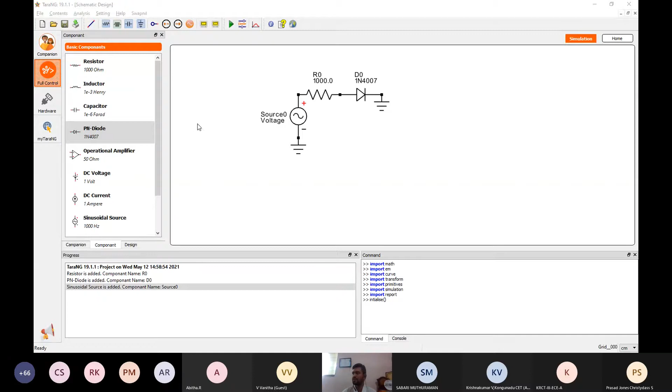So it is simulating this problem now. After simulating, we can see different results, voltages at the resistor, R0, VA and VB, I will plot. So we can see that the voltage is getting clipped around 0.6 volt because of this diode.

Now we will increase the voltage level. Instead of 1, we will try to make it 5. Apply. And now again we will run this simulation, and then plot the voltages again.

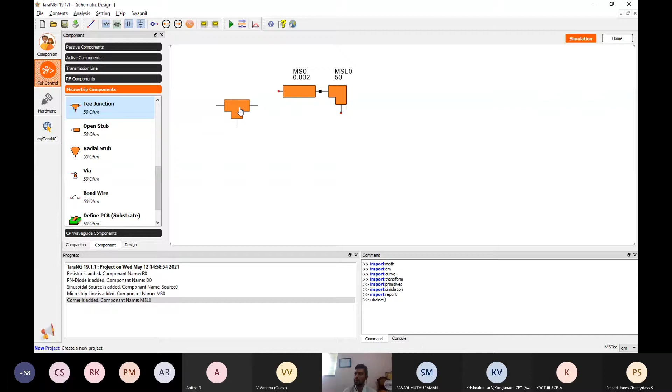Similarly, there are different kinds of subjects. We can go through microwave circuit design, taking different microstrip components like coupled lines, corners, cross, gap, T's and so on to perform high frequency analysis. These discontinuities and high frequency models are useful for creating microstrip networks, rat race couplers, and so on.

We can also use different kinds of transmission lines, like coaxial, twisted pair cable and rectangular waveguide. By using these components, we can create different high frequency circuitries and run them for S parameter analysis. We can also take isolators, circulators - mostly all necessary components are there. We can also make circuitry using CPW lines.

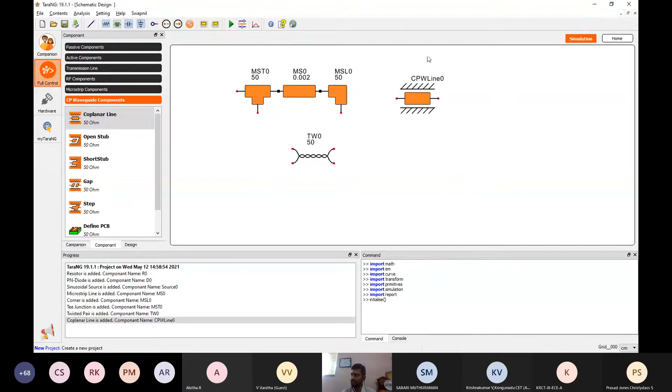Now I'll go back to the home and click on the circuit block diagram design. The difference between circuit analysis and block diagram is that in circuit we have the relation between voltages and currents, while in block diagram you have the relation between voltage and voltage only. So this is also called the signal flow model, and the circuit is also called the conservative model.

Here again we can perform different kinds of subjects, like communication system or control system. We can take different feedback loops and delay blocks, and make a feedback loop from this particular system. We can add the wire, and this way we can make these feedback systems and run the simulation.

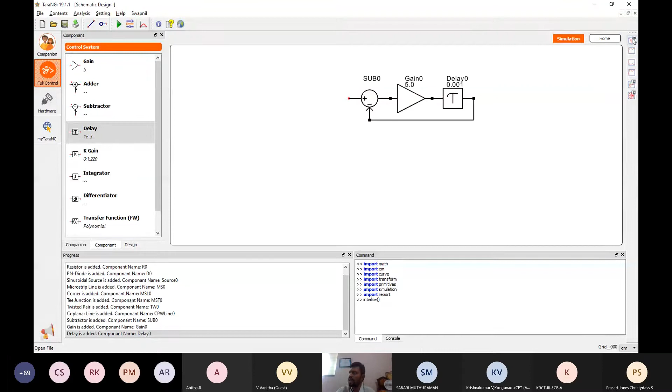At the output, we will have Nyquist plot, root locus plot, Bode diagram. Then there are also a few more subjects in this control system that you can go through - this microwave circuit, electronics, power electronic, control system, communication system, signal processing.

In communication system, you can draw different modulation techniques - we can study here. We can add this ground, and then change the frequency again here, and run the simulation.

It is going to tell us how the modulated frequency, modulated signal will be. We can also go on adding this demodulator circuit and make this larger circuit also here. For now, I'm just using this basic block to see the amplitude modulation, so this kind of waveform will be generated after performing the amplitude modulation.

We can also see the Fourier transform of this particular signal - any signal we can draw on the FFT scale. Here we can see what frequency components will be present in the circuit signal. So 200 is the input signal frequency, and because of that, we have 1000 minus 200, 1000 plus 200.

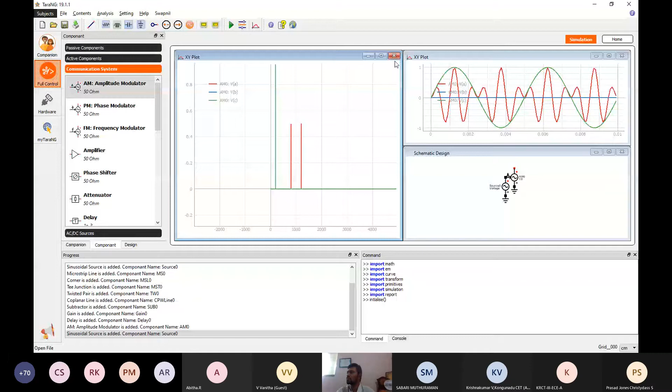Similarly, we can also do FIR and IIR filter design by taking different Z-inverse blocks, or different samplers and amplifiers and so on.

Our goal is to study this 3D design component in more detail, that is like 3D circuit design or 3D microwave design. Apart from this 3D, I'll just give one more detail - these are the 4 subject levels, like circuit we have seen just now, control system, and this system block also we have seen. In 3D, there is this facility of drawing different structures, like we can use different cable wires and so on.

For now, I will just quickly simulate one dipole antenna, and I'll explain this later, or I'll go to the ready examples. This particular 3D design is allowing us to make 3D designs, and there are different operational modes for all the subjects - one is companion mode, second is full control mode, third is hardware integration, and fourth is myTaraNG portal. I will also explain these different operational modes now.

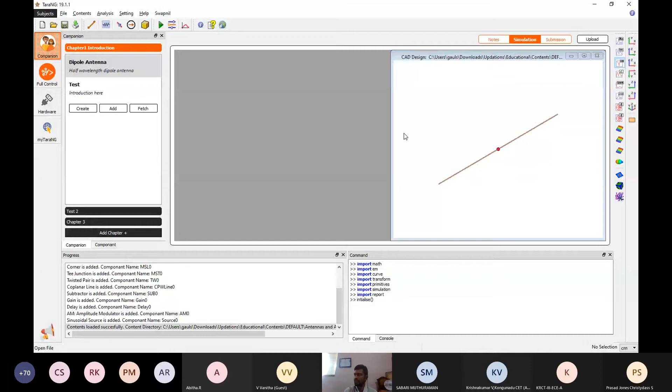After editing or after adding the things, the next thing is simulation. So in the simulation, we can see these 3D models or any related circuit or any other block diagram we are having, we can see it here. And after that, we can see different results of this particular design. So this is the real part of input impedance, then the magnitude part, S parameter.

So the second unique feature of this software is the slider. So what I will do is that I will take one slider here. So suppose this is the dipole antenna which is simulated in the companion mode, and now we want to see what is going to happen if we change the value of this diameter. So we can also assign different sliders for different elements. So this slider is again a user-defined slider which can be created by the faculty.

So here we can see that we can increase the diameter of wire, and we can see how the real part of input impedance is. So once the wire diameter increases, the input resistance will reduce. So that thing we can observe here. So in the software, whatever parameter we are using, we can assign them as a slider. So the diameter of wire, the value of resistance, the value of the location of port, anything can be a slider.

So we are increasing the diameter, and we can see how the real part of input impedance is decreasing. So we can see that both the plots are updating simultaneously. Again, there is a third plot we have plotted here. So I'll show that also. So this is the S parameter graph. So now we will see what is going to happen to the S parameter when we increase the diameter. So here we can see that this S parameter is reducing.

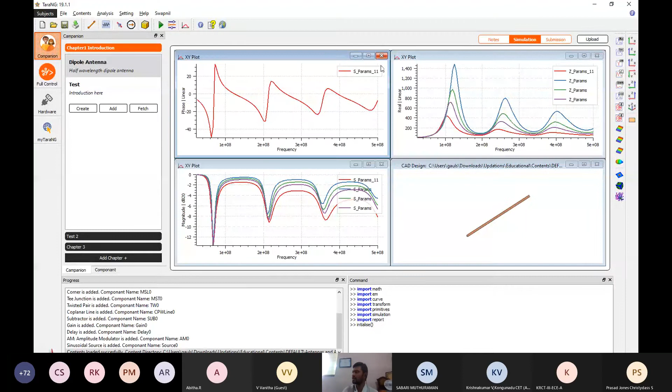We can export this graph. We can save it as JPG, PNG. We can save the CSV file. We can change the font of this axis. So many things we can do with these graphs also. And there are also features that we can plot multiple graphs like angles, then the Smith chart. So different kinds of necessary plots are there by using which we can understand this particular concept.

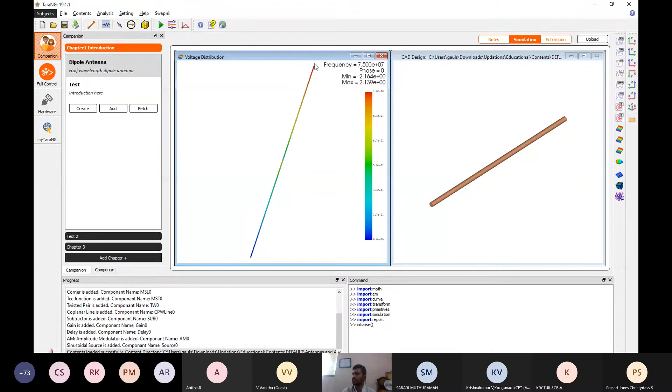We can also see this voltage distribution, current distribution. So here this is the voltage distribution where we are going to see that at one side it is peak positive and the other side it is negative maximum. So the voltage is having these maxima at the two ends, which is positive and negative. Red means maximum, blue means minimum.

And here we can also see the current distribution. We can also plot them in 2D. So the current is maximum at the center and minimum at the end. So we can see here it is maximum at the center and minimum at the end. Then we can also see the radiation pattern in 3D. And the near field also we can plot. So we need to just define the space on which we want to plot this near field.

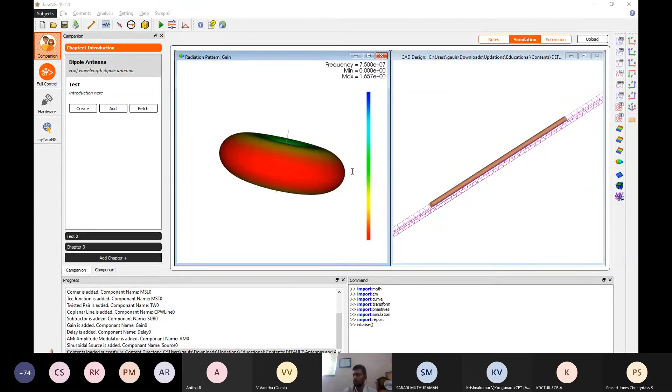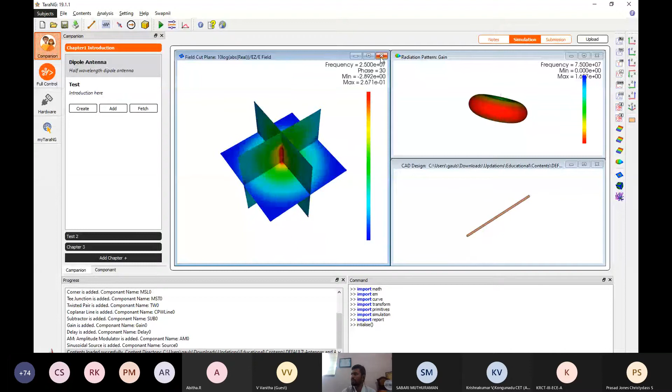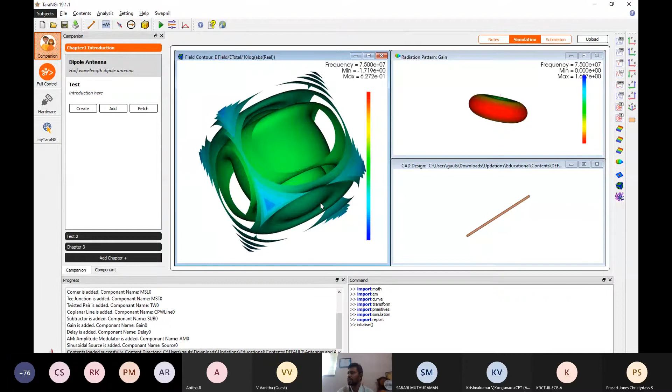So in the companion mode, what we are having is the notes. In the notes, there can be a theory written for a particular example. Then there is the simulation tab. In the simulation tab, that particular model will open. Whatever theory we are reading, the same model will be attached to the simulation tab. And there is one more tab, which is submission. So submission is related to question answer sessions. We can add multiple MCQs here.

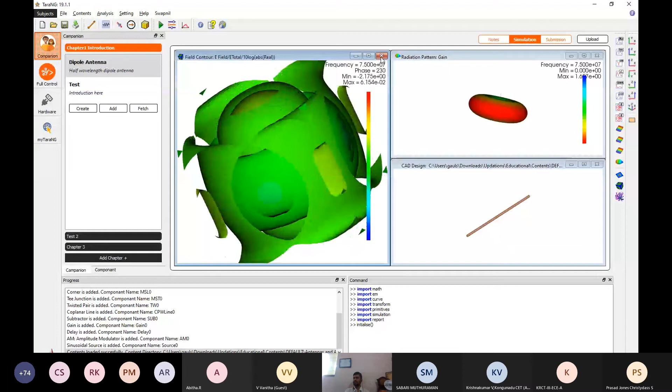So basically students are going to read the notes. Then they are going to open the simulation model. They are going to play with these simulations. And after doing these simulations, they can understand the things and they can make the submissions. Right now, in the offline software, we can only see the questions but not perform the submissions. But on the online portal, we have the submission facility also.

So in the online portal, we have the entire facility that the teacher can create the account, the teacher can upload this content to the portal, send the request to the faculty, faculty can accept the request, faculty can upload all these simulation models on the portal, then students can access those models on the portal and they can perform the submissions, then the report card will be generated. So all these facilities are available on the portal.

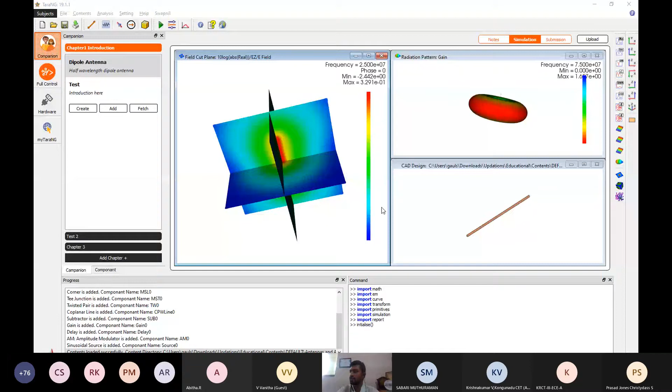So for now, I'll just tell you how to create and upload this content on the portal. For that, we just need to click on this create button. Once we click on this create button, we need to give the title, like sample 1, and then we need to write a one line introduction, and the abstract can be multiple lines. Once we add these things and click on the OK button, it is going to be added in this list, we can see.

And here we need to just right click, edit the notes and start typing. When we type and save these things, that content will be created. We need to go to the simulation model. I will explain how we have created this simulation model. We can create this dipole antenna or many other examples in the simulation model itself. After discussing the web portal, I will discuss how we have made these simulation models and simulations.

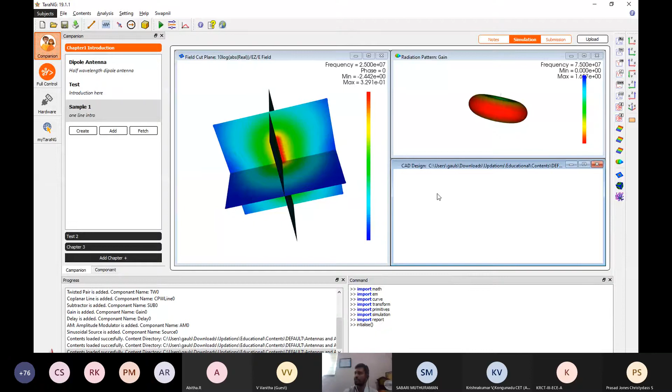So here we need to create the simulation model and run the simulation analysis. And after that, we need to add multiple questions. Once we right click, there is a window where we can type the question. We just need to cut this and type our question and options, option A, option B, option C. And I can also edit this option. We can also have a supporting image. Once we click on add, this question bank will be created.

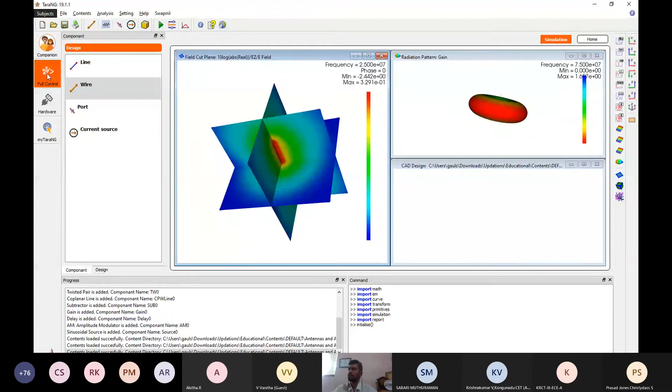And after that, we just need to click on the upload button. Once we click on the upload button, all these things will be uploaded on the web portal. How it will be uploaded, I will just explain. For that, we just need to have this account. At the start screen, we can see that there is user ID, password, and API key. So you need to register on the website of MyTarang. Once you register, you just need to enter this API key, password, and this particular email ID.

This software is also running the simulation on the cloud, so it is necessary that the user should be logged in. This machine needs to be connected to the internet, and once the user enters these details, it will be connected to the Tarang cloud. And whenever faculty clicks on the upload button, things will be uploaded to that particular account using these credentials. To get these credentials, you need to visit the myTaraNG portal.

So here it is. Here is the button, launch myTaraNG portal, or we can also get the myTaraNG portal from this fourth operation mode. Once we click on this button, this website will open, and you can take the user ID, password, and API key from this website. So I will open this website. You need to join this portal to get access to all these things. So I request Madhura to explain this myTaraNG portal now.

Yes, thank you, sir. I hope that what we have discussed so far is clear to the students. And after discussing the portal, we will discuss a few more examples on the antennas.

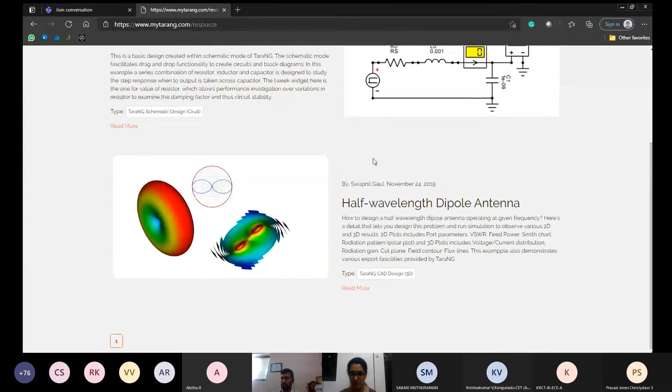Now I will show you this resource center. So here on the right side, we can see resource center. After we click there, here in resource, I will show you the half wavelength dipole antenna. So once the faculty has uploaded their content, it is seen here. The faculty's name comes as an author. Here are the notes which the faculty uploaded; the students can read all the notes first, then they can go through the

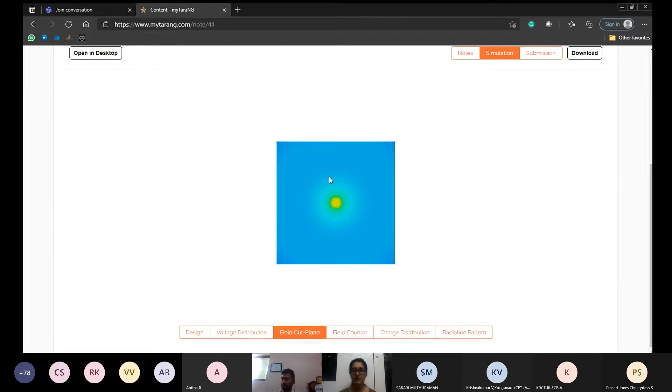simulation. Here for the simulation, after they click on design, they can see the design, the 3D design of the dipole antenna, whichever antenna the faculty uploaded. Then the voltage distribution, the different colored voltage distribution, field cut plane. I'll not go in detail because sir already explained this.

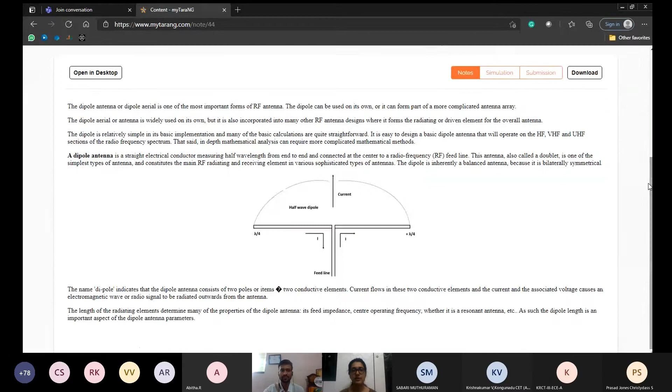And the third tab is of submission, where students can submit all the answers. It is a sort of quiz. So there are ABCD options, and yes, I did it. So this is submitted. Okay. Now the faculty can change their notes anytime they want, and also students can remotely operate the Tarang software.

Here there is open in desktop mode. So after clicking, you have to enter your email ID, password, and API key, which is in the dashboard, and then the Tarang software is opened on your desktop. So I hope I'm clear with the login thing. And here you can see the number of teachers with whom you are connected from your institute.

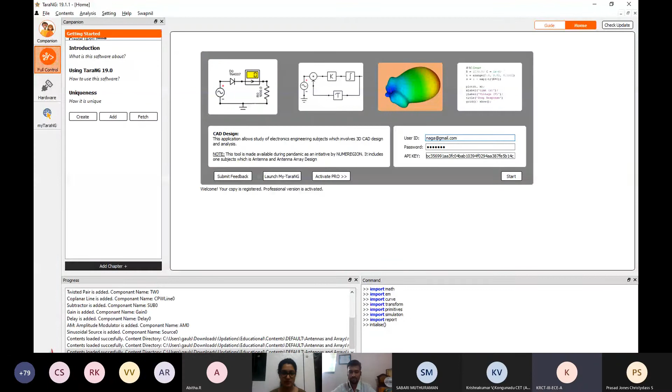Hello, sir. Yes, sir. So anything to add? Yes. I will share a few more things from my screen. Okay. So you are able to see my screen? Not yet, sir. Okay. I'll share once again. Yes, sir. Now it is visible. Thank you, sir.

So here we can see the dipole antenna examples that we discussed earlier, which were uploaded on the portal. So once we click on the upload button, the same things, the simulation models, the submissions are going to be uploaded. So I'll open it here. There are different examples uploaded by this particular faculty. This model we have already seen just now. I will show you the desktop version of the software.

There are so many examples that we can go through. For now, the same thing we can see here, the simulation, the examples. To start the desktop version of the software, we need to click on this particular button. Once we click on this button, another small software is going to start, and in that software we can see all these simulation models again. So this is the third product that we have. The first product is the full software, second is the web portal, and third is the desktop mode of the software.

I'll just show you the desktop mode of the software. Meanwhile, you can also see that the different plots which we discussed earlier are uploaded here in 3D. So students can access all these things from their smartphone, or we also have the Android app, so we can also directly open these things in the app. And the unique thing is open in desktop mode. This is one of the most important buttons.

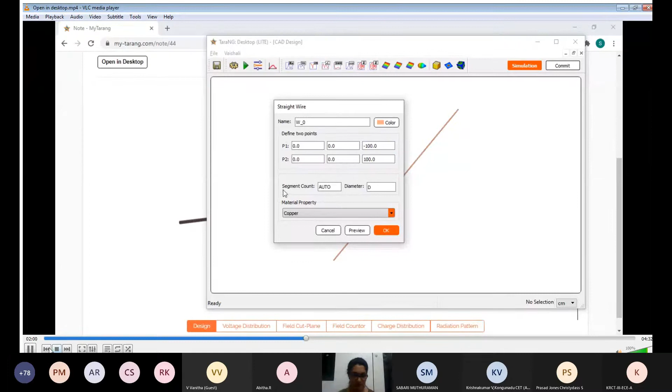This is the tweak simulation which sir explained about. We can change the diameter of the wire. It is just sliding of the wire. As per the application, we can change. Yes, so we can see the diameter changing. After double clicking on the wire, we have to see the length. As this is 200 centimeters, we can change it from -100 to +100.

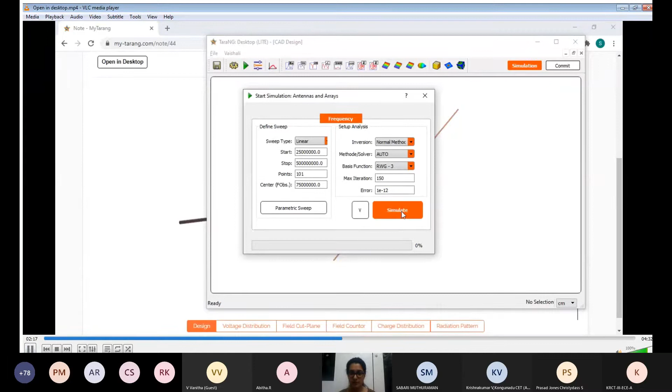And click on run. Okay, so this is the starting frequency and the stop frequency. And we have to click on the simulate button. So now it is in simulation mode so that it can give results. So this is the S parameter, scattering parameter. Then we can see the current distribution.

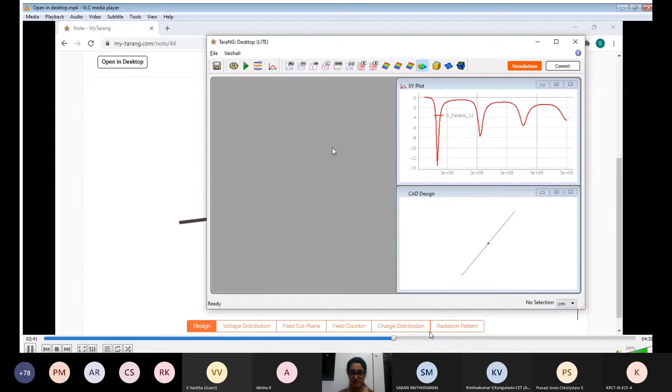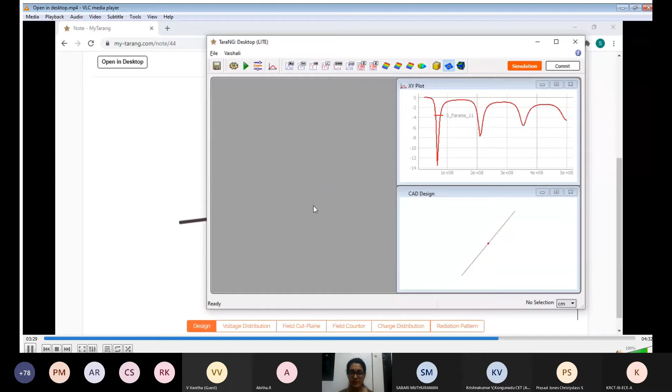Yes, this is field cut plane, and we can see the simulation simply by right clicking and clicking on run. There also we have export to VR. We can view it in VR. Yes, so this is a field cut plane, but we can't see the run simulation online. For that, we can see it on the cloud software as well as desktop software. But we can view the same thing here.

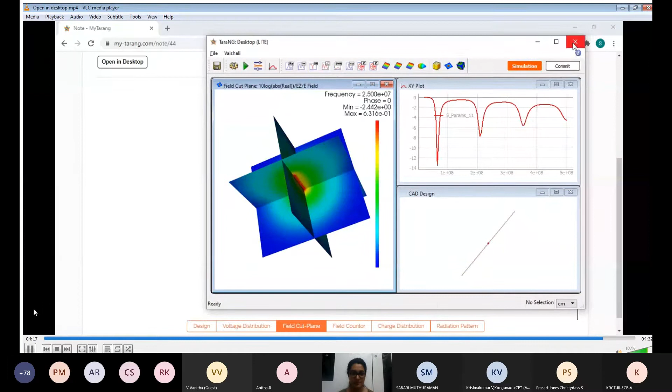So this is the desktop software where we can see the full screen and we can design whichever antenna we want as per the applications. And also faculties can change the notes for the theory part and the lab practicals, and they can give questions to students. So this was about it.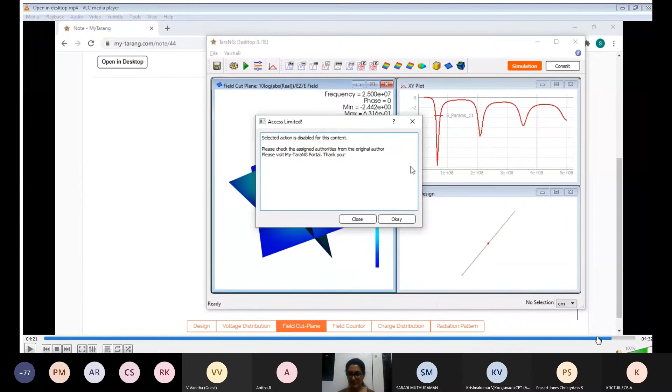So thank you, Madhura, for explaining this desktop mode of operation. The basic difference between the full software and the desktop mode is that the desktop software is again connected with the cloud. Whatever example we open on the website will open in the desktop version automatically whenever we click on the open in desktop button. And then we can practice more simulations, change the size.

But one more difference is that in desktop mode, we cannot edit the geometry. However, in this full software mode, we can also create the geometry. So now we'll see how we can create the geometry or the design. Rather than only how to create and simulate the problem, I will also try to explain the physics behind it. We will start from a simple dipole antenna and experiment on it in different ways to see the different effects.

So now I'm sharing the screen. Yes. We will discuss a simple dipole antenna first, and from that dipole antenna we will try different variants. To create the dipole antenna, first we need to click on this wire. We are going to create a dipole antenna operating at 75 megahertz frequency. So can some student calculate, when we have 200 centimeter length, what will be the resonant frequency?

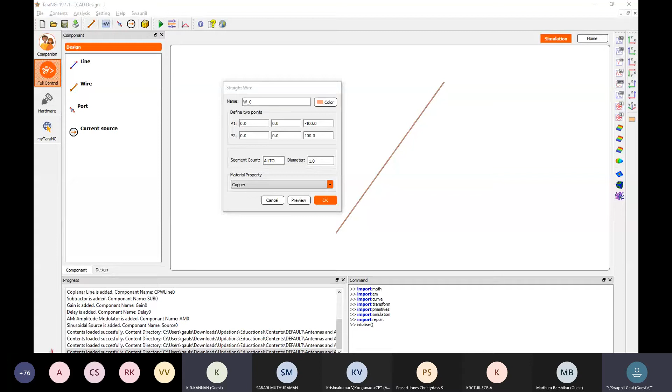Yeah, if any student can calculate this parameter. So I will explain how we can calculate this. To calculate the length of a dipole antenna operating at 75 megahertz frequency, first we need to calculate the lambda. So lambda will be 300: 3 into 10 to the power 8 is equal to 300 into 10 to the power 6. So 300 divided by 75, it is around 4.

So when lambda is 4, the length will be 2. In centimeters, it will be 200 centimeters. To create a wire of 200 centimeter length, we need to take 2 points, 0, 0 plus 100 and 0, 0 minus 100. Once we take these 2 points, it is going to create a dipole antenna with a length of 200 centimeters, a diameter of 1 centimeter, and the material is copper. By default we are choosing copper, but we can also change the material here.

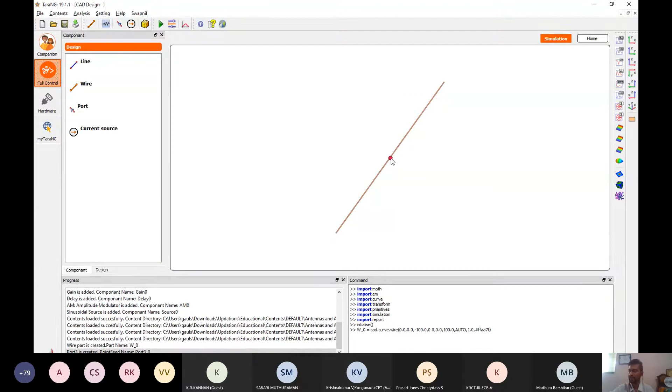After doing this, we need to click on the OK button. This is the simple step for designing a dipole antenna. Now we are going to apply the port at the center. Once we put a port at the center, we can double click on this port and make sure that the location is 0, 0, 0 and the characteristic impedance is equal to 50 ohm. We will click on OK and run the simulation now.

We are going to run the simulation from 25 megahertz to 500 megahertz. Instead of zeros, we can also type it like E6; that format is also supported here. The center frequency is our resonant frequency, which is 75 megahertz. So we are going to simulate this problem. After the simulation, we can see different results.

Real part of input impedance, imaginary part of input impedance. Here, students can note that the imaginary part of input impedance is initially capacitive, and it changes from capacitive to inductive, and again from inductive to capacitive. At lower frequency it is capacitive because it starts from minus infinity. That means this open wire works as a capacitor at lower frequency.

Next, we will also try to make this wire closed and observe the behavior. In that case, we expect it to be inductive because of the duality principle. The duality principle explains that when we replace open with short, the capacitor will be replaced by an inductor, the electric field will be replaced by the magnetic field, and voltage will be replaced by current. The same things are going to happen here.

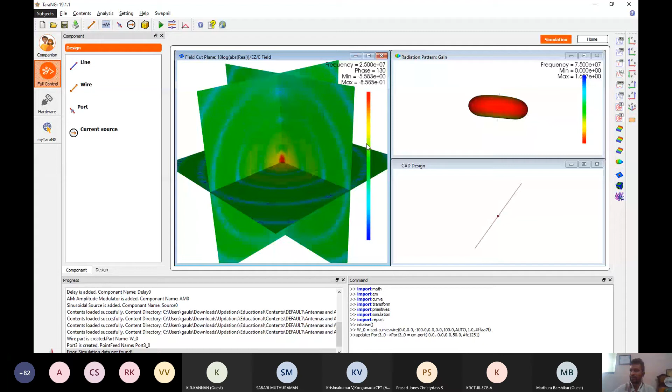So now in the next simulation, what we will do is try to make this antenna closed so that it will be a square loop antenna. And when we have this square loop, what is going to happen? We have discussed that it is going to become inductive, so we will see how it is going to become inductive. For now, I'll keep this graph open.

So I will make it closed. To make it closed, I will add one more wire. This wire is having 200 centimeter length. To make it a square loop, there will be another wire located at 200 centimeter like this. Once we draw and short these two wires from top and bottom end, it will be a square loop. So I will take two more wires now: it will be 0 to 200 with positive 100 as Z, and again 0 to 200 with negative 100 as Z. So now it is going to become a square loop.

Now we will run the simulation for this square loop antenna, and any student who has learned this loop antenna can tell me the resonant frequency for this square loop. By the time I run the simulation - right now I'm putting the center frequency as 75 megahertz only, but it is not 75 because we have changed the design. So now anyone can tell me the resonant frequency for this square loop.

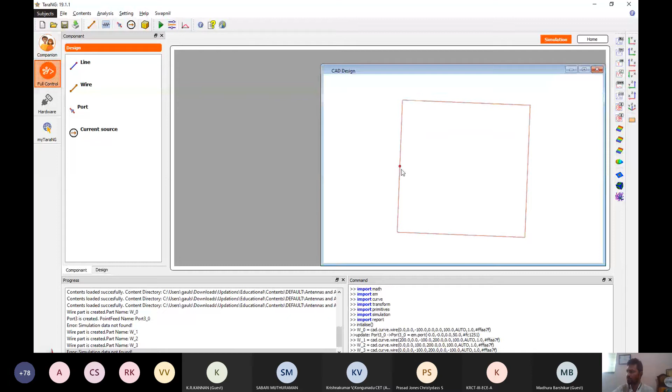To get that S parameter less than -10 dB, we need to perform impedance matching. For this, the input impedance and the port impedance need to be same. In theory, the characteristic impedance for this folded dipole antenna is 200 ohm, which is 4 times more than the dipole antenna. So once we make this 200 ohm, the impedance match is going to happen.

Now we will simulate this design, and once again we will plot this. Now we can see that this S parameter is less than -10 dB at 75 megahertz, as well as around 37.5 megahertz.

Now we will see the radiation pattern. I'll just divide it by 2. At this particular frequency, we are finding out this radiation pattern. So at this resonant frequency, 37.5 megahertz, we'll get this kind of radiation pattern.

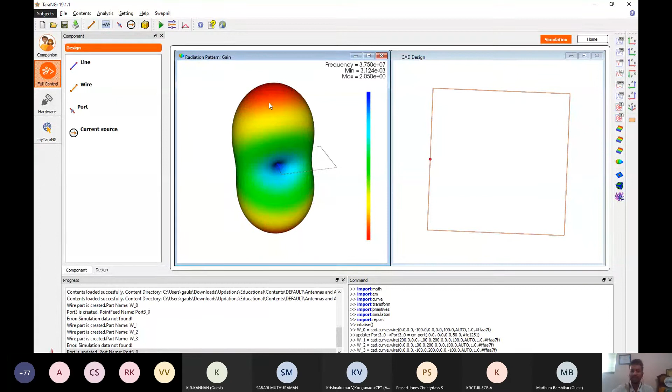Here we can see that this radiation pattern is not like a dipole antenna, and it is showing maximum radiation towards the axis. So this is axial mode of radiation. The folded dipole antenna radiates maximum towards the axis, which we can observe from this radiation pattern.

We can also see the current distribution. Right now this first wire is connected to the second wire directly from the top and bottom shorted wire. We have this loop, and because of this loop, we can see that there is current on the second element also, this vertical element.

But suppose we did not join these two wires from the top and bottom, what is going to happen? Will there be any current on the second wire or not? That's what we want to observe now. So I will try to remove these two wires, and then we will see whether there is current on the second wire or not.

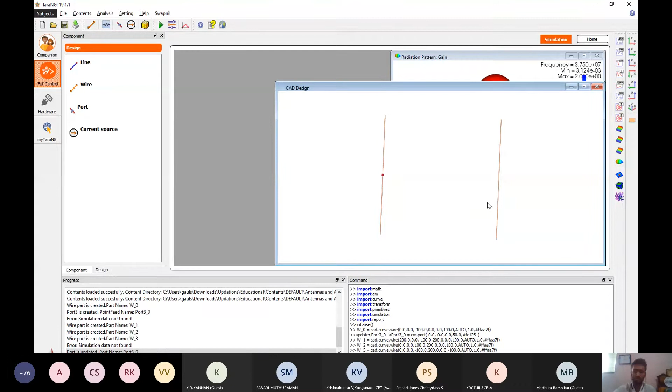So I will select this wire, then delete, select, then delete. Now we will run the simulation once again to see if there is current induced on the second wire or not. Previously there was current because it was shorted, so there was a path for the current. But now suppose we have one wire which is excited, and another wire which is kept open, and we want to see whether there will be current or not. So we have removed the two wires, and now we are running the simulation once again.

So again we are going to plot this S parameter. Now this S parameter shows us a dip at 75 megahertz, because when we remove these two wires, previously current was flowing on all these wires, so the effective length was more, and because of this larger length, the resonance shifted towards the left.

Almost the length was double, but now after removing these two wires, the length is again just the first dipole only, and because of that we got this resonance at around 75 megahertz. So after removing the two elements, the resonant frequency is increased.

Again, this is not less than -10 dB. The reason is that the characteristic impedance for this open wire antenna is 50 ohm. For shorted it is 200, but for open wire we can make it 50. Now we can run the simulation again.

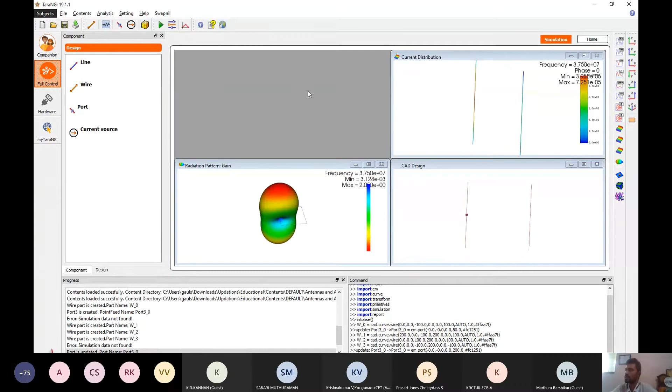Okay, the operation frequency is changed now. I will run the radiation pattern simulation. I will enter this frequency as 75. So at this frequency we want to plot the radiation pattern. I will simulate this, and now we will plot the radiation pattern again.

This time the radiation pattern will be like this. Earlier, if you see, the radiation was towards the axis. Now also the radiation is similar here. This particular radiation pattern is called end fire radiation pattern, like end fire array.

Similar things exist for helical antenna: the axial mode of radiation is equivalent to this end fire array antenna. In case of end fire also, we get a similar kind of radiation pattern, this directional radiation pattern. Earlier, when there was only one dipole antenna, the radiation pattern was omnidirectional. But now, when we have one wire and a second wire kept close to it, the radiation is going to change, and we can see that this radiation has some directivity.

Now what we will do is try to change the length of this wire, or make this wire closer to the first wire. Instead of 200, I will try to reduce this dimension, let's say I will make it 50. Now the wire is more closer.

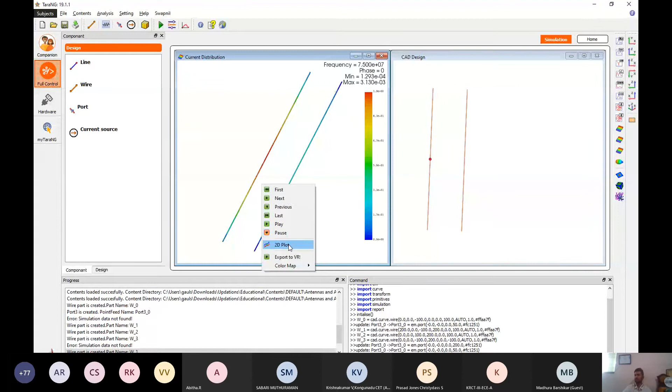When we have this wire kept more closer to the first wire, the current coupling will be more, so now we will observe this result. Here we can see how this current is coupling - this is current on the first wire and this is current on the second wire. The current amount is increased after making it more closer, and we can also see the radiation pattern.

So this radiation pattern is changed a bit. We can see that when we have this wire close to the driving element, the radiation is in this particular direction - it is in the opposite direction.

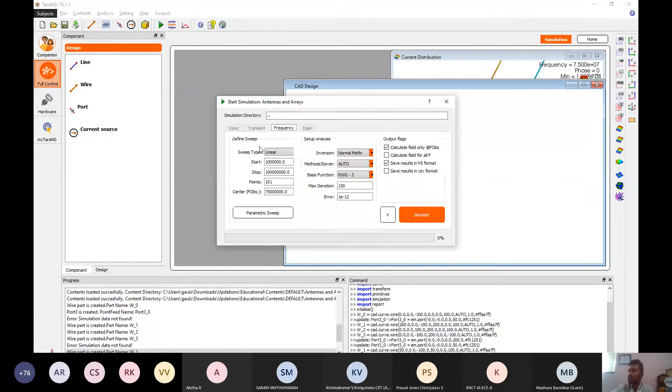Now we will try to change the length of this particular wire, making it shorter. I will enter the dimension, let's say minus 50 to plus 50, so that is half of the first. Now we have the first wire and then a second wire which is shorter in length. Now we'll run the simulation and see this radiation pattern again.

When we have this wire shorter, we can see that the radiation is maximum towards that wire. We can see there is one wire here, and these radiations are maximum in this particular direction. So when the element is shorter, the radiation is maximum towards that shorter element. Because of that, it is directing the signal, so this shorter element we also call a director.

I will add one more shorter element this side, and we will see that it increases the directivity. Right now, note down the directivity: here it is 1.74. In case of the omnidirectional pattern, it was 1.5 - I forgot to mention that earlier, but now it is increased, it is 1.749. Now I will add one more smaller wire, or try to make this even smaller.

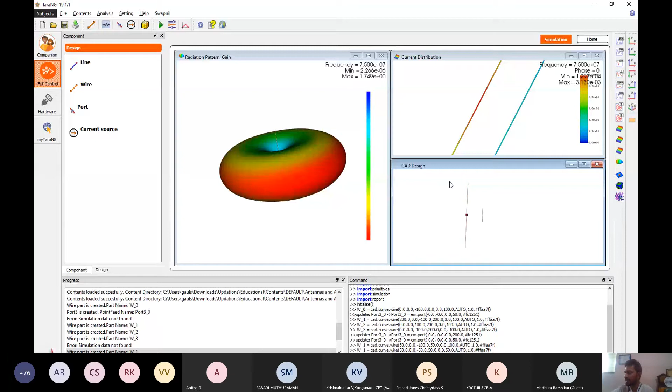Instead of minus 50, I will make it minus 20 to plus 20. So now this second wire is much shorter than the first. Now we will run the simulation and plot the directivity. Okay, so we need to increase the diameter, the length, or we need to increase the number of directors.

Sorry, 75 to plus 75. Now we'll run the simulation. So now we can see that the directivity is again increased to 2.29.

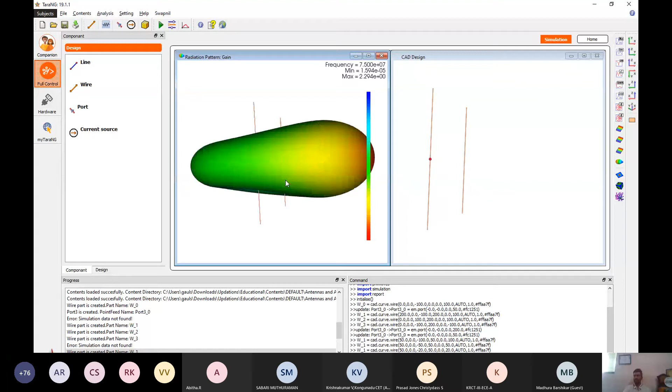Now we will try to make this wire greater than the other wire. Instead of 75, we will enter a bigger value like 125. So the second element is now greater than the first element. Now we will run the simulation and plot the radiation pattern again. In this graph, we can see that this dimension is too big, 125.

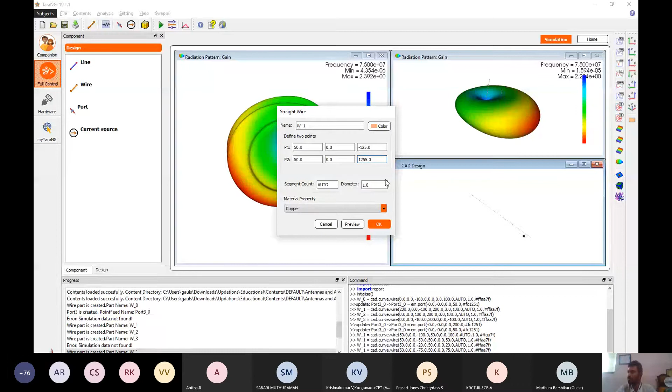Okay, by mistake, I entered 1255 here. Now we'll run the simulation again. Yes. So now here we can see that when we have this bigger element, it is going to work as a reflector. So the maximum signals will be in the opposite direction. So from these two graphs, we can see that the shorter element is going to attract the radiation, the larger element is going to reject or reflect the radiation.

So this is the concept of Yagi-Uda antenna. In the Yagi-Uda antenna, we have the same things. At one side, we have a bigger element, at the other side, we have a smaller element. And in that case, when we increase the number of smaller elements, the directivity is going to change. So now we will try that thing. We will add one more wire.

So yeah, 50 is the separation distance. So here I will make minus 50 because we want it to be at the other side. So 75 and plus 75. Yes. Now at one side we have the bigger element, at the other side we have the smaller element. Now we will get more directivity because one part is working as a reflector and one part as a director.

So we'll add it at minus 40, and I'll make this, or we can also have similar length. So minus 75 to plus 75. Sorry. We can increase this spacing. I will try minus 60. Yes. So for now, we are keeping the second element at minus 80 distance. So we are having two directors.

Now we will plot this radiation pattern once again. So again, we can see that after adding one more director, the directivity is increased. This is the left one. We can see that it is 3.99, means around 4. And earlier it was 3.169. So this is the way that we can go on adding reflectors and directors to get a directional radiation pattern, and we can also increase the directivity of this particular radiation.

There are some formulas in the textbook on how to design a Yagi-Uda antenna. Here we have just randomly taken the elements to demonstrate how we can achieve the desired directivity and how we can get the directional pattern. But by properly using the values which are in the book, we can also design Yagi-Uda antennas.

Yes, so far we have simulated three antennas. The first one was the dipole antenna, the second was the square loop antenna, the third one was the Yagi-Uda antenna. Similarly, we can also design many other examples like antenna arrays. If we want to make an antenna array, we need to use the current source and apply simultaneous excitation on different wires, and we can run the antenna array simulations also.

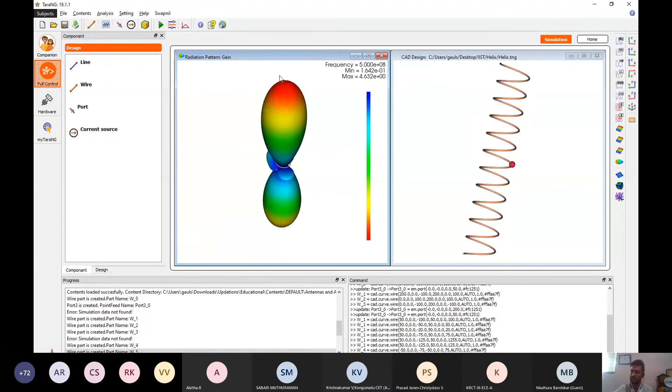So here again, we have simulated the helix antenna and the loop antenna. A similar radiation pattern will be there because a helix is nothing but a combination of loops. So we got this radiation pattern towards the axis. The axial radiation pattern we can see here. Then we can also see the current distribution.

So on different elements, we can see how these current maximas and minimas are going to repeat. So there are several examples, like we can make spiral antennas. Many other things are there. So I will just demonstrate. So from here we can take these different shapes like circle, ellipse, and so on, and we can make different kinds of antennas. So these are linears.

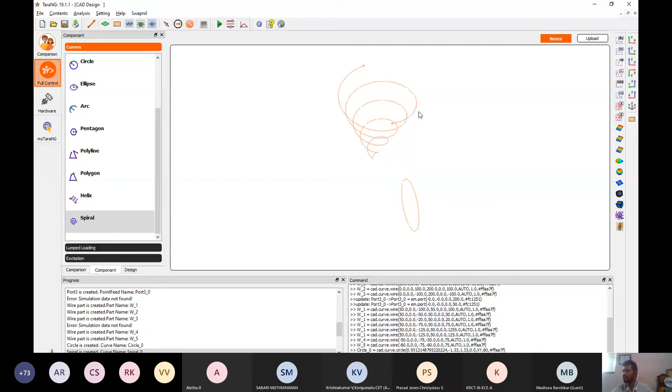In the next, we will see how we can make non-linear or planar antennas. So in case of linear, we can draw these shapes in this way. We can select them, right click, and assign them as a radiator. We just need to enter the diameter of this particular radiator and the material properties. So in this way, we can create this wire antenna.

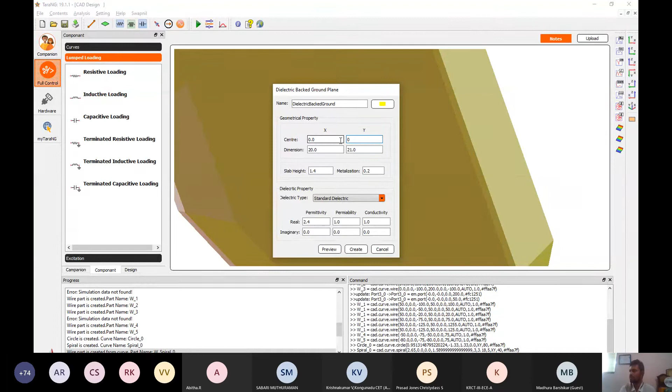And now when we want to make some planar design, we can go to this particular window. So I will explain. Yeah, so microstrip network is also there. So here we can take this board PCB. We can enter the dielectric properties here, whatever dielectric we want to use. And after taking this dielectric slab, on this slab we can construct different things.

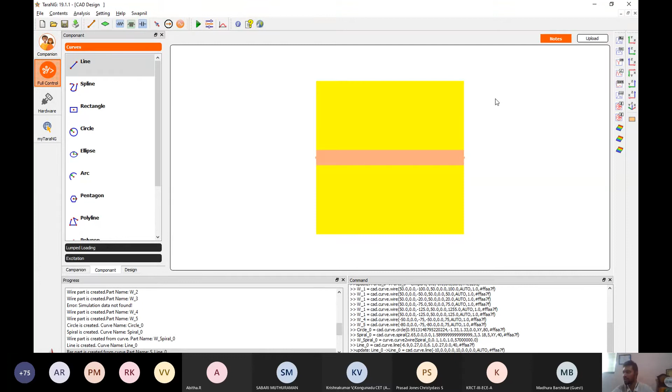For example, for a microstrip line, we can simply draw this line. For now, I'm just drawing it randomly. So we can change these values like -10 to +10. This y point is 0. And then we can select it, then assign the microstrip line properties. Randomly, I'm using this width value, but students can accurately calculate the Z0, and accordingly calculate the W. So in this way, we have simply created this microstrip line, and now we can apply the port.

So one port will be at left, the other port will be at right. We can also add inductors, resistors, capacitors, all these loading elements on this particular design. So this is 50 ohm, and this port location is -10, 0, 0, and the second port is also 50 ohm. We can also change the annotation. For example, if I want to make this port rectangular, then in the excitation we have this port. We can select this port, right click and edit the annotation so that we can make it rectangular.

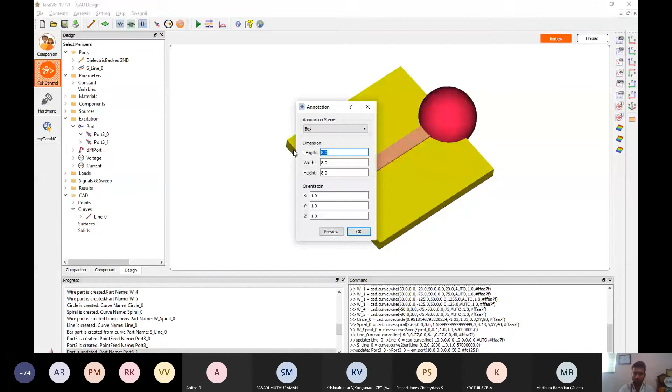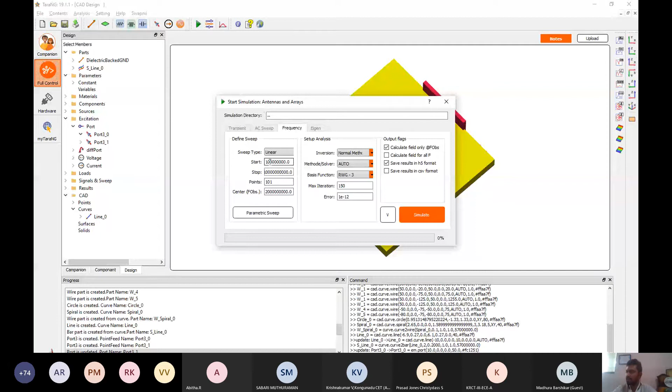So when we want to make it a box, we can just enter the values. So this way we can make this port and this microstrip line network. This editing annotation is optional. It is just changing the appearance from sphere to rectangle. But when we run the simulation, the results will be accurately calculated. So we are running this analysis from 0.1 gigahertz to 10 gigahertz with 2 gigahertz as the operating frequency.

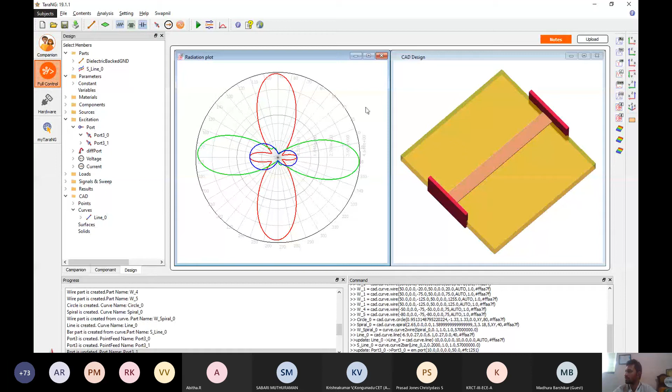Once we simulate this, we can see different plots like the magnitude plot. We can see here the S11 and S12 parameters for this microstrip network. We can also plot the current and the Smith chart. Okay, sorry, this is the radiation plot. So S11 and S12 we can see on the Smith chart, and we can see voltage distribution, current distribution. We need to turn on the field so that we can also plot the 3D result.

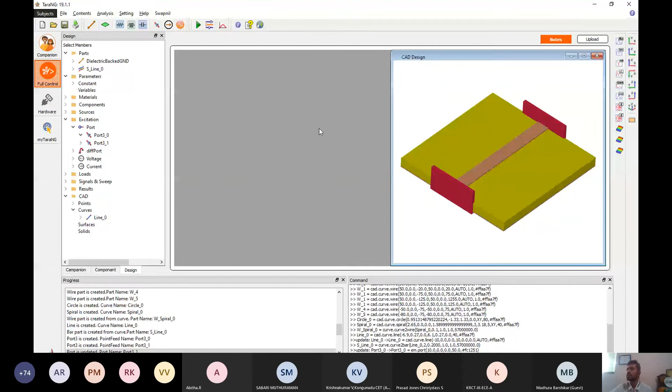These 3D results are not required for a microstrip network, but for a microstrip antenna they are required. Suppose we have a transmission line; in that case we don't find the radiation pattern, but we find S12. But in case of an antenna, we find the radiation pattern. So similarly, we have different examples for microstrip also. This rat race coupler is also there. So I'm just opening this rat race coupler.

So here, before running this rat race coupler, I need to check whether this file is in the same format. So we need to run this rat race coupler, and after that we can see the different results. So this is a 4-port network. It is going to give us the S parameters as a 4x4 matrix.

The next model available in the software is the interconnect model. So I will just go to VLSI interconnect. Again, we have different kinds of interconnect models that we can see here. I will open one of the examples. So it is loading. I have loaded one interconnect. Yeah, so this is a 30 pin interconnect.

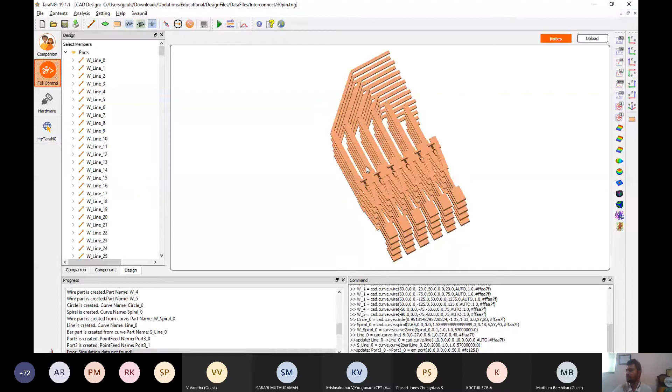This is one of the complicated designs. We can also find the parasitic coupling between different elements. In this case, we can get the S parameter 30x30 matrix. So this is a very large matrix that we can get from this particular software. There can be different cable bundles, cable bars. We can calculate the signal integrity and crosstalk issues for different cable bundles and bars.

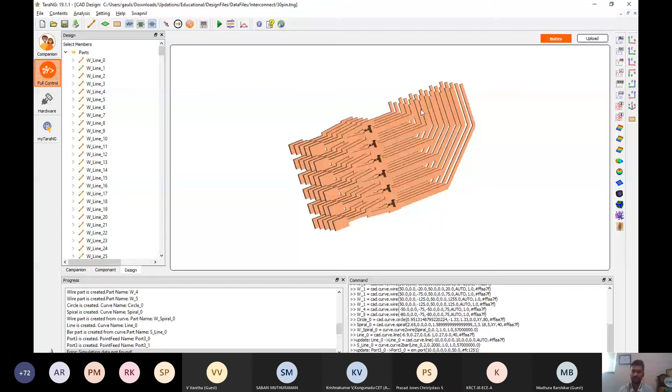So we can see that in case of the antenna, there were only 2 or 3 wires, but the software is also capable of solving multiple wires. In this example, we have around 30 wires. So even if there are 30 wires, the software can handle this particular thing.

And why is the software fast? The answer is that the software solves this geometry by using surface formulation rather than volume formulation. If you see other techniques which are available in other commercial software, which are FEM and FDTD, both techniques are volumetric techniques. That means we need to make a volumetric mesh, sugar cube mesh, or tetrahedral mesh, and then we need to solve. Because of that, there is a lot of memory requirement and space requirement.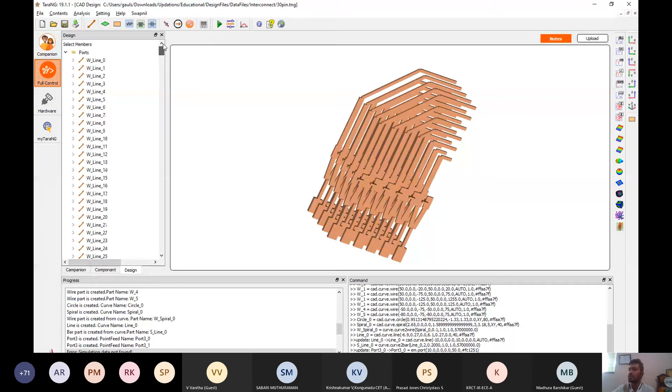But in our case, we are not solving using these volumetric meshes. Because of that, we can get the simulation result in less time with more accuracy. Now I'll go to another topic which is related to radar analysis. Similarly, in the software, there are also a lot of other CAD design options.

For example, suppose we want to, yeah. Till now I just explained this part, curve, but there are also surfaces, booleans, and transforms. By using these options, we can create almost any kind of geometry. Here we can take a surface like a rectangle, or we can also take a box, sphere, or cylinder. All these things will come in 3D.

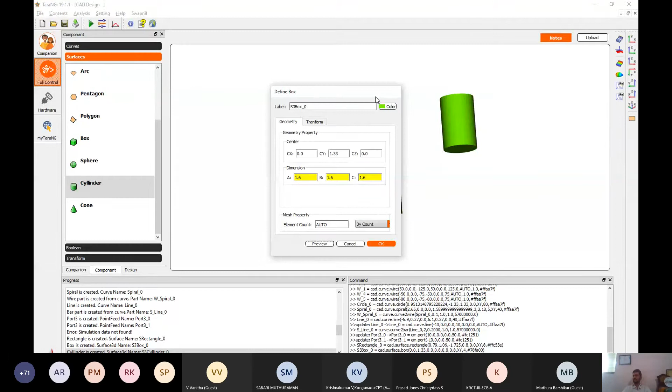Once we draw it, we can see that these are 3D things. We can double click and change the location and the size also. After double clicking, suppose I want to make it 0, 0, 0, and length is 2, all these parameters 2. We can see that the dimension is going to change. We can also change the color. So these things we can change.

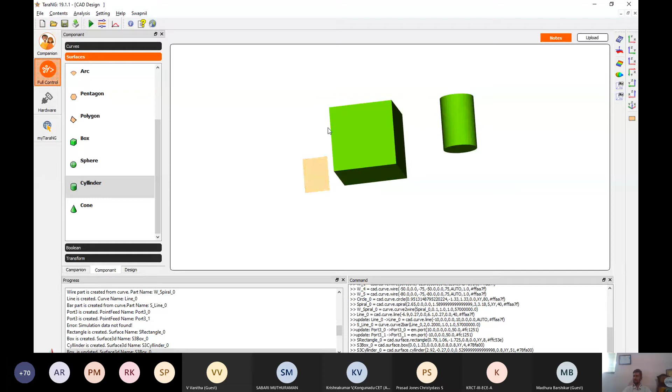After creating these models, we can also select any model and assign different properties to that model. Here we can assign perfect electrical conductor, resistive sheet, composite material, multi-layer composite, PEC coated multi-layer composite. Those kinds of electromagnetic properties we can assign to the design, and we can simulate that design and get the result.

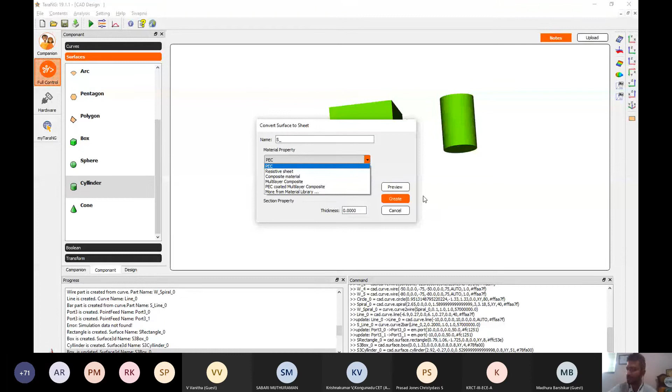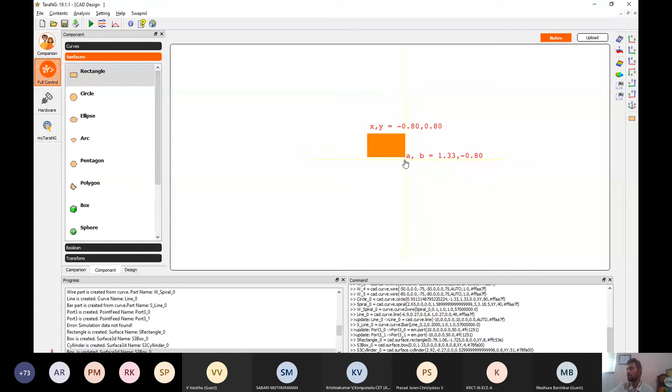For now, I'll just go to a simple design, which is a rectangle. Suppose we want to find out the radar cross section area of this particular rectangular sheet. To make it unit area, we will set width equal to 1 and height equal to 1. Now we will select this rectangle and assign it as a perfect electrical conductor.

PEC is the default, but there are a lot of material options. We can also have multi-layer composite and so on. We just need to enter the dielectric constant and permeability. After creating this material, we need to run the simulation. When we design this RCS simulation, we can run bistatic RCS, monostatic RCS, theta polarization, phi polarization, single reflection, double reflection. All these settings we can do.

We can also plot this RCS in the XY plane, YZ plane, XZ plane. We can define the starting angle and end angle. All the necessary options for calculating the RCS are present in the software. We can define the angle, the material, the CAD design, and which kind of RCS we want, monostatic or bistatic, and we can simulate.

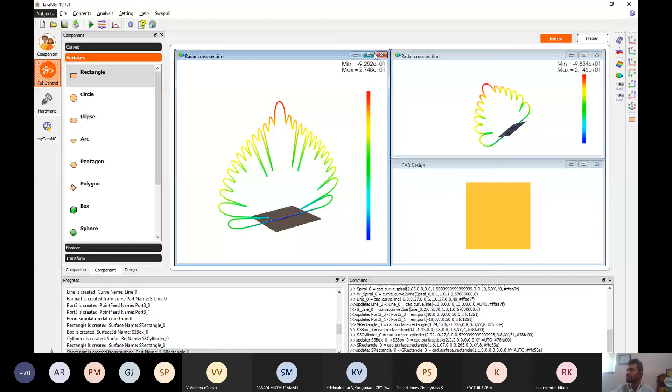So we can also do these RCS studies for most complicated structures. Here we can use Boolean operations to union and subtract different shapes. And there are also all the transformation operations necessary for any kind of CAD geometry or CAD model, like sweep, extrude, taper. By using these options, we can make almost any kind of shape: duplicate, array, rotate.

Suppose there are some geometries which are very complicated and mostly designed in another software, and we want to import that design. The software also has the facility of importing. After clicking on this button, this import file window will come. In the import file, we need to point to the STL or OBJ file which we want to import.

For example, I'll just import one, like the Stealth Bomber. Many geometries are there for many applications: Air Force, Army, Navy, and space applications. Suppose we have imported Helio. In that case, we can see this helicopter geometry, and we can also find out the RCS of this helicopter geometry.

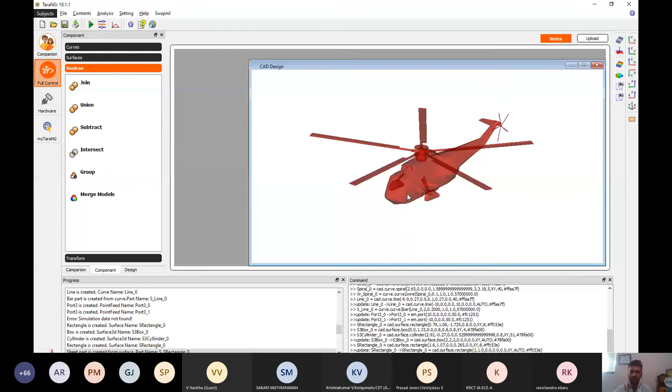When we observe this Helio at 1 gigahertz frequency, again this helicopter has a very large size compared to the frequency. We'll make it PEC for now and simulate this at 1 gigahertz. So we are able to solve large size problems in very little time using a normal laptop. It is not required to have a very high configuration laptop. Even with a 4 GB or 8 GB RAM laptop, we are able to solve this problem.

So it will take around 2 to 3 minutes, not more than that. But if you see the problem size and the frequency, even if we solve this problem in 5 minutes, that time is very less. So we'll wait for a few minutes and the result will be there.

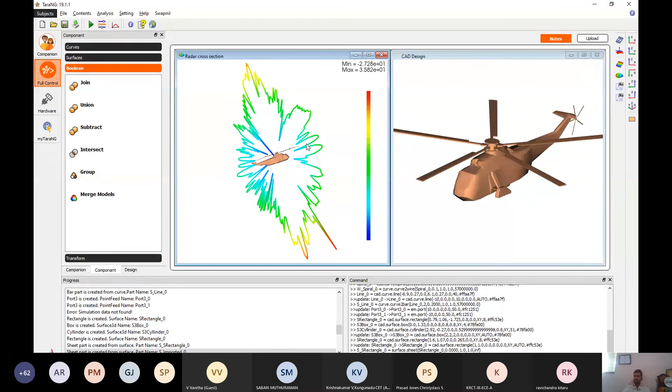We can also see the current distribution. When the waveform is coming from the bottom side, the red part shows where the waveform is hitting this object. So when the signal comes from the bottom side, the maximum reflected part will be this red one, and the minimum reflection will come from this blue part.

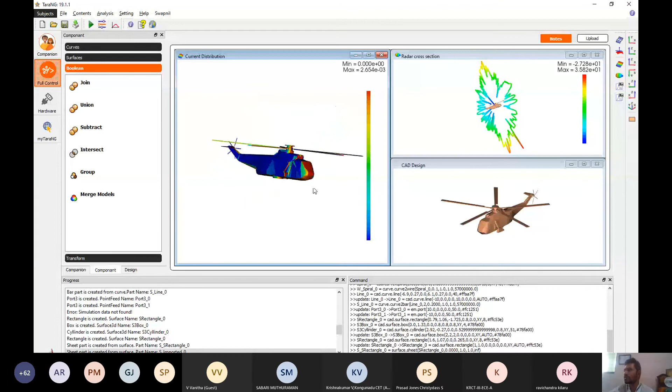We can also play the animation, to see how the current distribution changes as the waveform rotates. Now it is bottom, now it is top. From the top angle, the bottom reflections will be minimum, and it will reflect maximum from the top side. So we can see this current distribution for different angles.